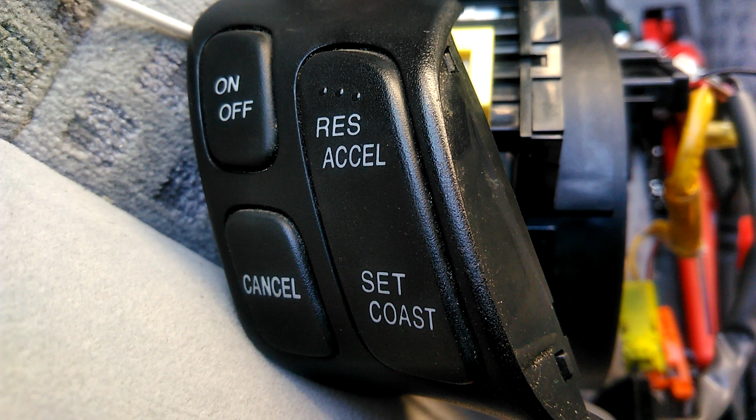Sorry for my voice, I had been to a concert.

So this is the cruise control from Mazda 6. I have already checked that it's working in a 6. It does work, so shouldn't have problems here. First, why do I think it should work, and what do I gain with it working?

This is the training manual for the Mazda 6, and it says that the construction and operation of the cruise control system is essentially carried over from that of the 626 GF model, except for the following. Now, these are all the differences.

Things are not similar. The cruise actuator with built-in control module has been adopted. So instead of having here a module electronics and under the hood an actuator, you have one thing only. This is the thing, and it is motor type.

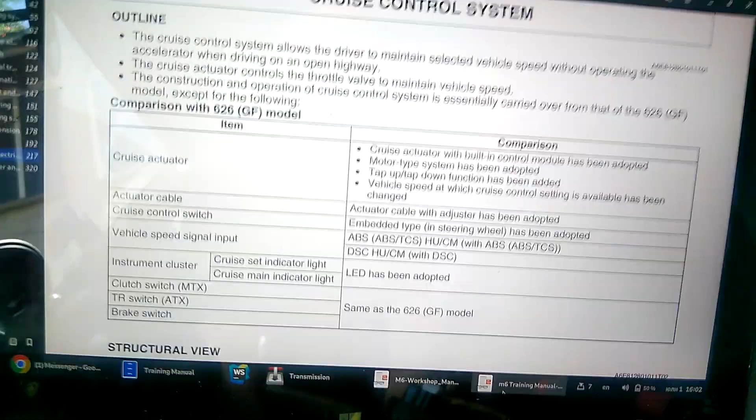The thing we have under the hood currently is vacuum type. This is a motor type, which is supposed to be more economic and more precise.

The tap up and down function has been added. That's why I actually want to do it, because I want to install a Mazda 6 steering wheel and I want this up and down thingy to actually work when I press it.

There are methods to actually make this work with the current cruise control, but I do not want to do that. I want an up and down function.

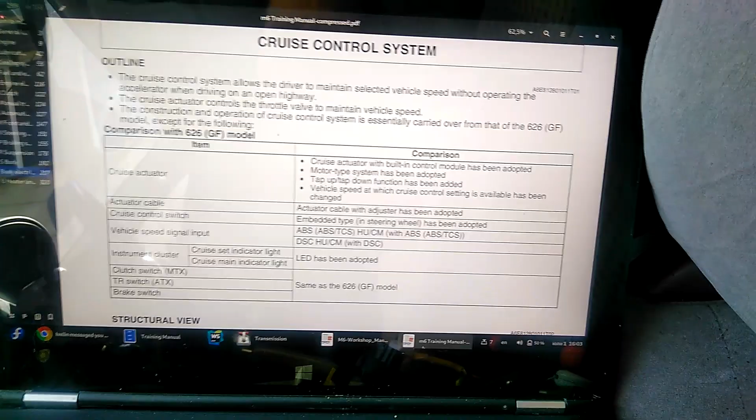And the vehicle speed at which the cruise control setting is available has been changed. It's changed to 30 kilometers, so it's lowered. Essentially we can turn it on earlier.

What's interesting is that we have the same clutch switch and brake switch, so nothing has to be changed for these. Nonetheless, I've done here a setup, a pretty simple setup.

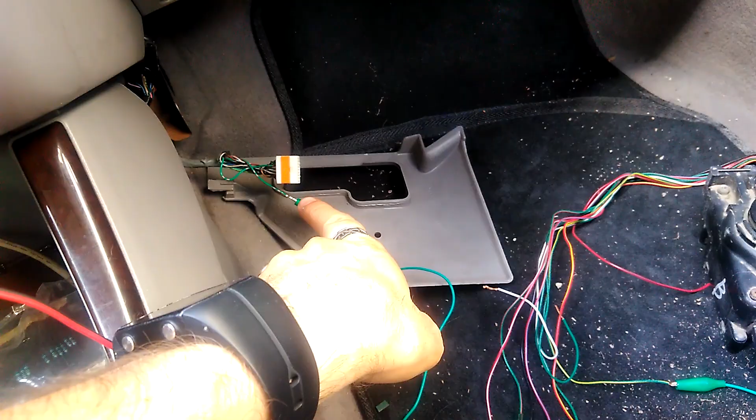The only signal I get from the car is the vehicle speed sensor. That's the only thing I actually care about. This is because I am a bit concerned, is the speed sensor the same?

Although I have switched this lever here with one from the 6, which can read the vehicle speed. You can actually check, I have a video on it, controlling the wipers based on vehicle speed, and it works. So still I want to check if this is gonna be happy with my vehicle speed sensor.

All the other wires I actually grabbed from here. I have here both battery plus and ground, and I have connected them as following here on this table. VSS, I told you I get it off.

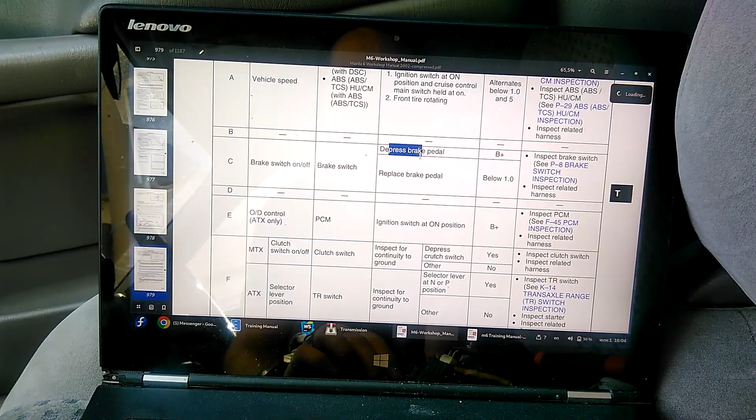This one, the brake on-off switch, goes to ground, because when the pedal is released, so when it's not depressed, it should be below 1.0 volts, goes to ground. And the clutch switch says when it's not pressed it should not have connectivity to ground. So this is the clutch switch wire, it just sits like that, nothing connects to it.

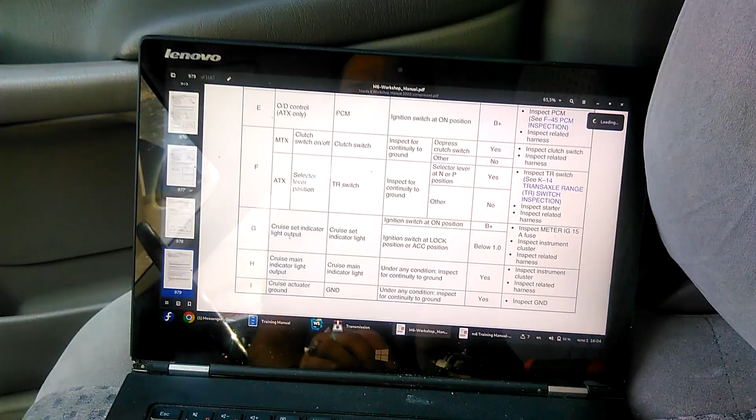Then the output, I've connected here the output. This one is supposed to show 12 volts when the set is on.

The main light I haven't connected, because I don't have it anyhow. The ground I have connected, of course, to ground.

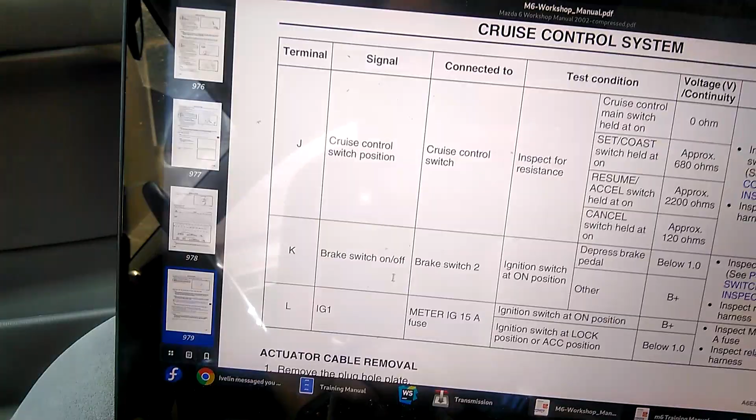Now the switch, I have here the whole assembly and switches, and I've connected it so I can easily turn it on. The brake switch goes to 12 volts, because this is the opposite brake switch 2, which is when you haven't pressed the pedal, you should pass battery plus.

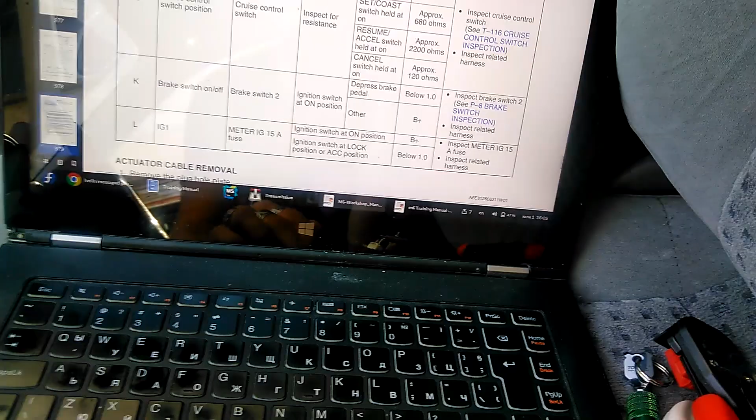And I have battery plus again here. Of course it's not when the ignition switch is on, because I get it from the accessories, which means I get it from when ACC is on, but that doesn't matter. So that's how I actually isolate all the switches that I have in the car, and I make sure that only the VSS is being read.

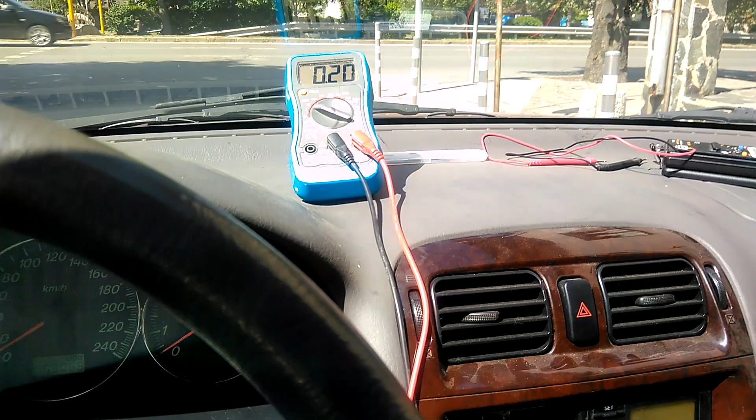So let's do a test. Okay, put my seatbelt on. Okay, seat belt is here. Supposedly, once I reach 30 I should be able to hit it, but I'll just to make sure, do it at 40 or 50 or something like that.

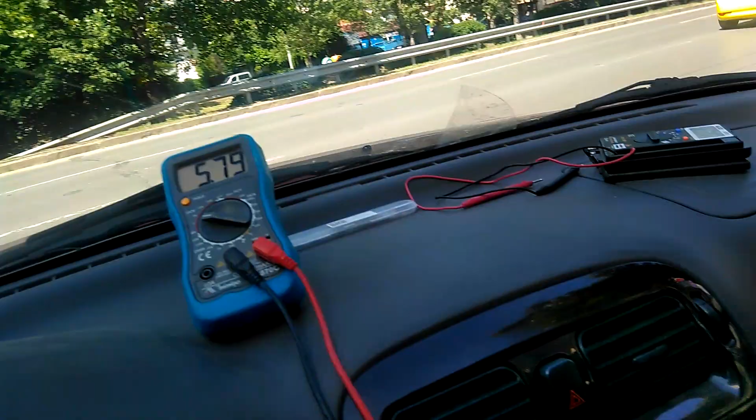Of course there's currently traffic. Okay, going. Okay, 40, I hit set. Yes. And you can see, and you can actually even hear it.

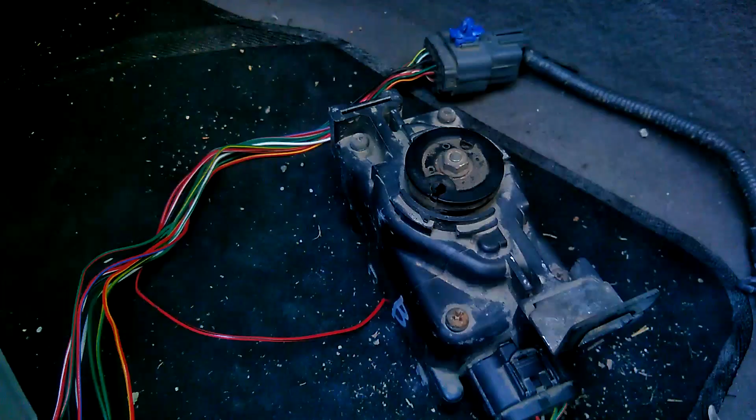Okay, it has reached the end because it figured out that it cannot accelerate the car even though it's trying, or maybe when I slowed down enough it actually cancelled. Anyhow, it seems to be working, so it's time to actually figure out how to mount it properly to the car and pull the actual wires, and then see what to do with the cable to the pedal.

Okay, so that's the temporary spot that I have found. I'll actually make it permanent, but I'll have to make more adjustments to the way I fixed it and the way that the cable works. But for a temporary solution, it should give enough idea if it's working or not. That's the original spot for the original cruise control. I'm using the same mounting here, and I also use the throttle body metal plank that holds the cable. I've also used it because of the way that it actually connects.

So just for the test, this is the original cable. I'm using this as an anchor point, so when this starts pulling, it actually pulls the metal part, not the rubber. Same goes here, that's why I use the throttle body. When it pulls, it's gonna pull the metal part. It goes like that, and goes in here.

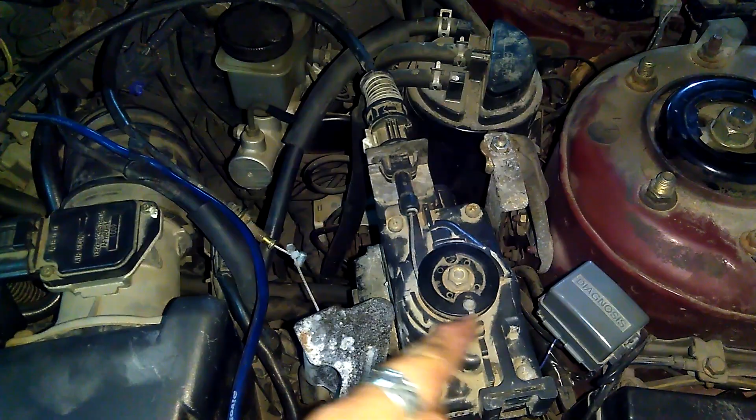Now that's temporary. The best thing would be to make this actually fit here. As you can see, the end is the same, but the length that I need here is way different than this one. This is way shorter. I'll see what I can do about that. As for the electrical part, that's the connector. Goes like that

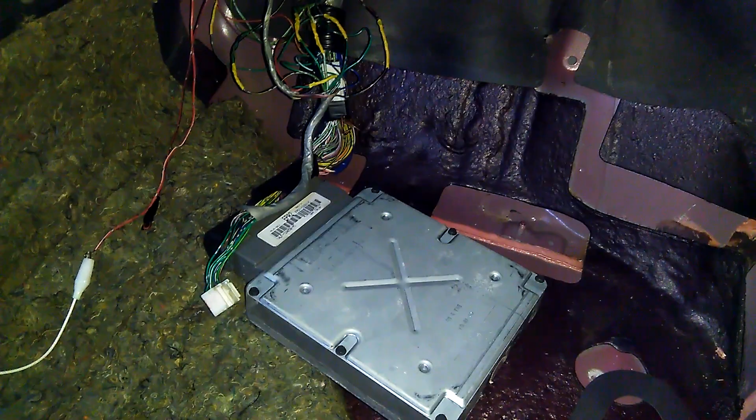and goes in here. Now if you do not know how to actually pull the cables through, or how to remove everything here, I've explained that in my other video where I actually install 626 cruise control to this car. Check it out, it's explained there how I pull cables through and how to disassemble everything here. So cables are here, all these yellow things are soldering points, and now I have an issue.

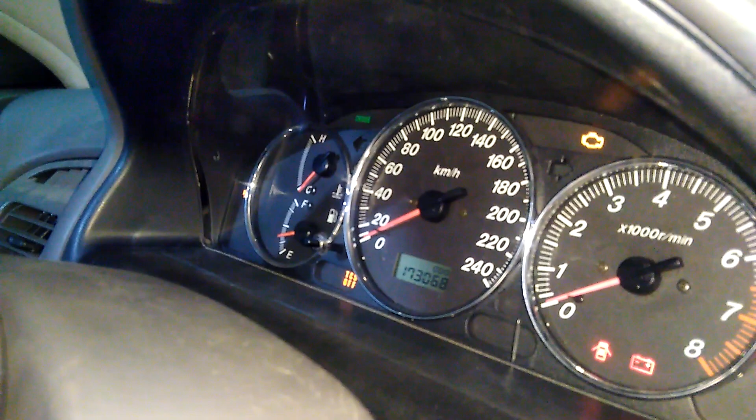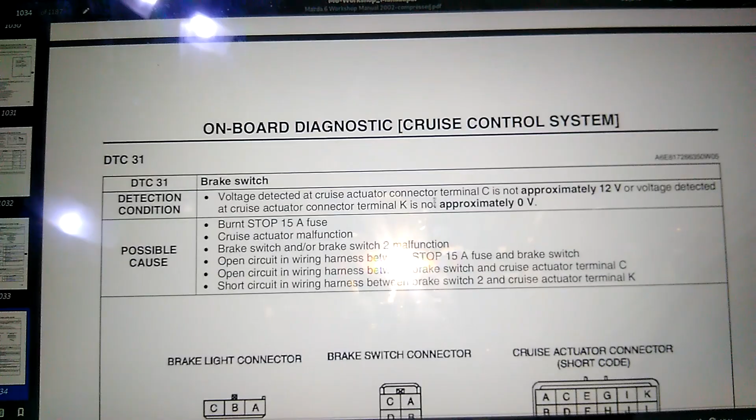I have started diagnostics mode: 1, 2, 3 long ones, one short one, and I've looked it up here. That's without me actually even starting the car. So I've checked the original one, doesn't have an error, and then I checked for DTC 31, it's the brake switch, and the problem is one of the two brake switches. So either the one that's supposed to have 12 volts when you do not touch the pedal, or the other one that has 0 volts when you do not touch the pedal, apparently doesn't work.

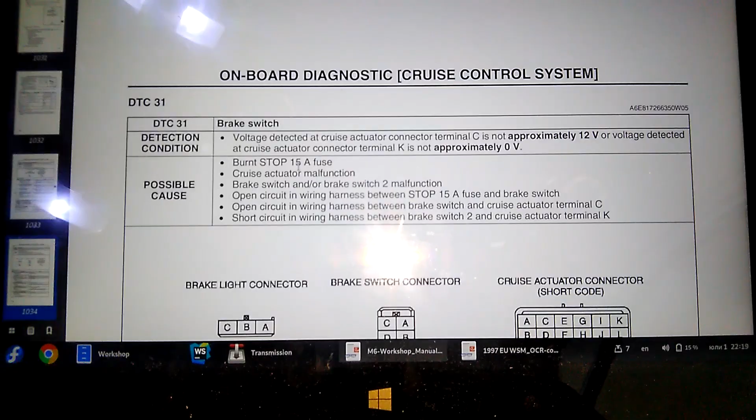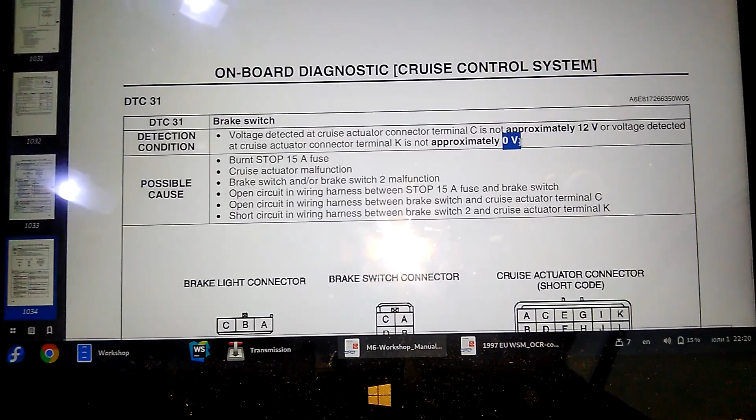So in the workshop manual it said it's the same switch, but apparently there are changes. My best guess is that for these 0 volts here, I was passing ground. I need to pass the ground here, and my best guess is the original installation of the car actually just has no connection, like it says here: open circuit in wiring harness between brake switch and cruise actuator terminal C. So that's my best guess, that I have an open circuit, so nothing is happening.

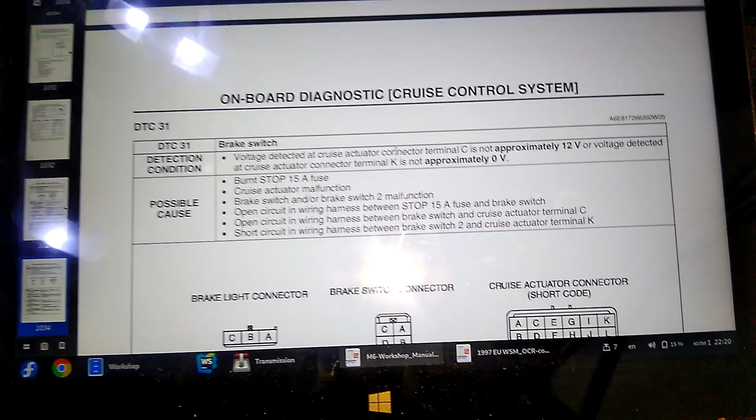I'm gonna do some tests now. I'm gonna measure what I get and see how I can modify things so I can get the proper thingy. Worst case scenario, if I get 12 volts here, I can use a relay, a double throw relay, and I can actually have a ground appear here, and that's actually better than having to change the whole brake switch,

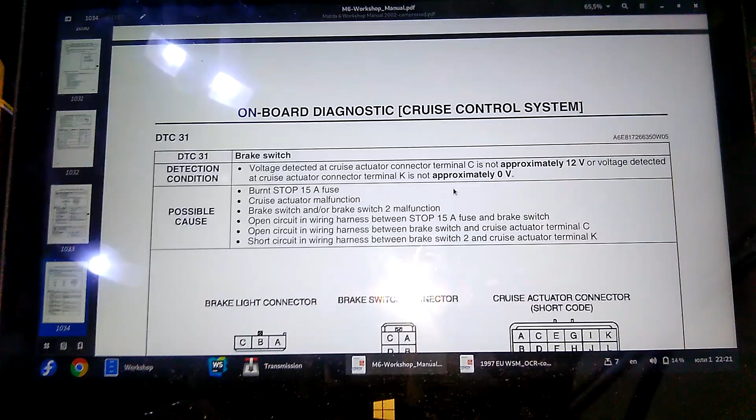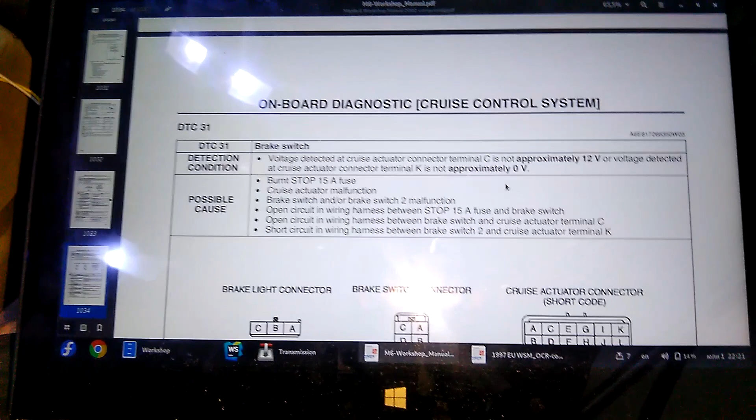because for the brake switch of the 626, if you watch again the other video of installation of the original 626, there are two types of brake switches. One is with cruise control and the other one is without cruise control, and I think you can use a simple relay to actually even use the original switch. Anyhow, I'll do some tests now, see why it is complaining about the brake switch.

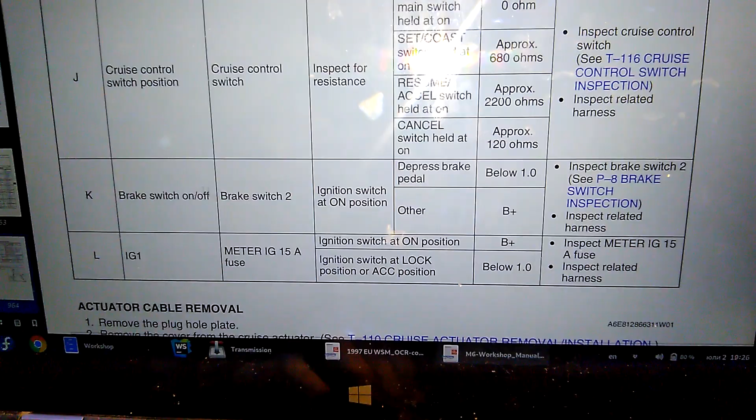Okay, I did figure out why the Mazda 6 cruise control is complaining about the brake switch. The problem was with brake switch 2, which is supposed to have battery plus if you haven't touched the pedal. So measure brake switch 2, and it's supposed to have battery plus. Now if you go here to the same switch on the 626, this one, with B plus, it seems exactly the same.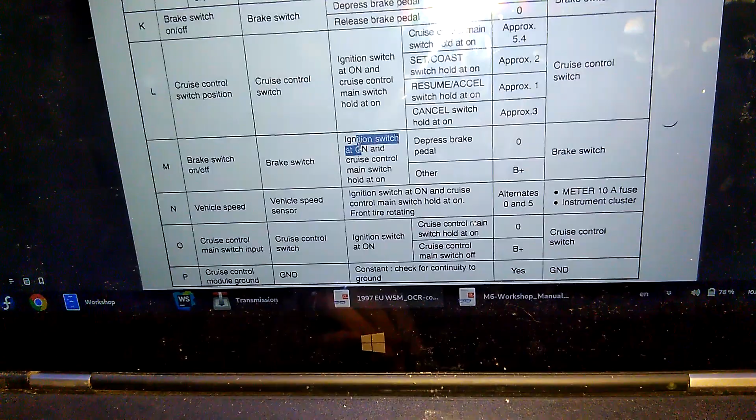Well, it seems. Now you have the test condition different here. You have to be on ignition on and cruise main switch held at on. Now that's the key: cruise main switch held at on. Here we have just ignition switch to on, and we have to get battery plus there. And here, if you just switch the ignition to on, you're not gonna get the battery plus. You have to also press the main switch. The reason for that is quite interesting.

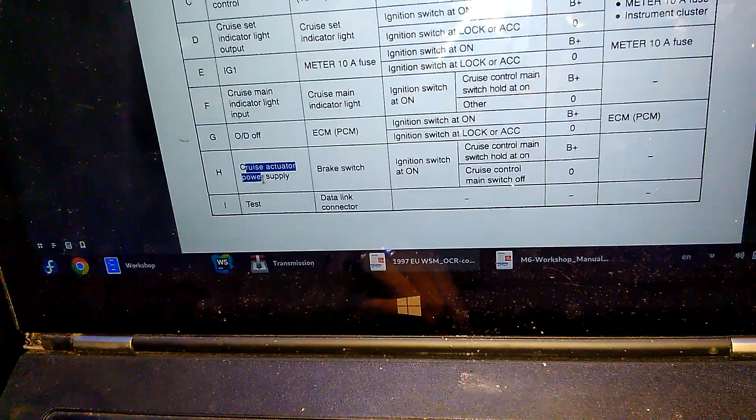If you take a look at this one here, cruise control actuator power supply, it actually connects to the brake switch, and also the test condition is from the ignition on, when it's at ignition on, and it helps to get battery plus.

So long story short, what I'm trying to say is the way that the Mazda 626 cruise control brake switch 2 works is by getting its battery level from the cruise control itself. So whenever you press this one here, you're actually powering on also the brake switch. So this cruise control actuator power supply goes both to the cruise actuator under the bonnet and to the brake switch at the same time. And then and only then you have battery plus at the brake switch.

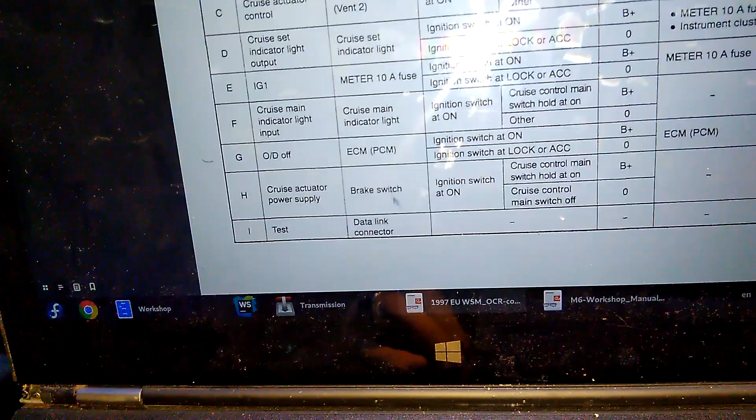While on Mazda 6, just by turning the ignition switch to on position, you already have it there. So when you press the brake pedal, you're already disconnecting, and without pressing it you already have battery plus there, while with the installation of the 626 you do not have.

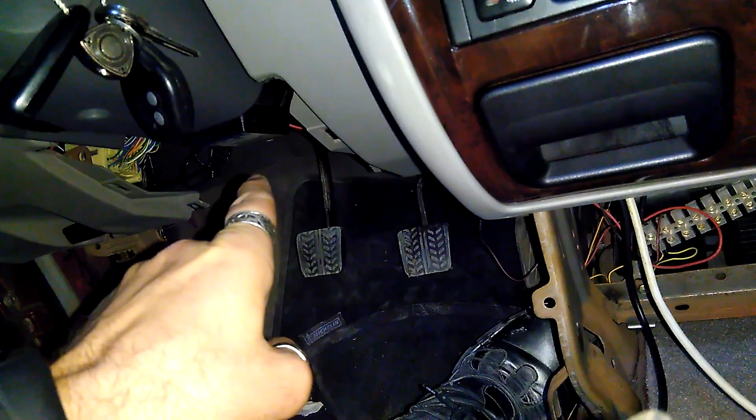So in order for me to solve this, I've just done this. There are two ways actually to do it. This is one way. It's dirty, and I'm gonna do it properly after I test everything works. I just connected the ignition wire with the one that's for powering the cruise control actuator. The other way is to actually fix it here with the brake pedal, with the brake switch. You just connect there the ignition to the other wire.

Now I prefer this way because it's backwards compatible. If you decide to go back with the 626 cruise control, you just unplug these and plug the cruise control. Nothing is going to change. And in the other way, if you do it on the brake switch, when you place here the cruise control module, you're gonna have extra 12 volts coming instead of going out, which probably shouldn't hurt anything, but I don't know what could be an issue there. So I prefer this way.

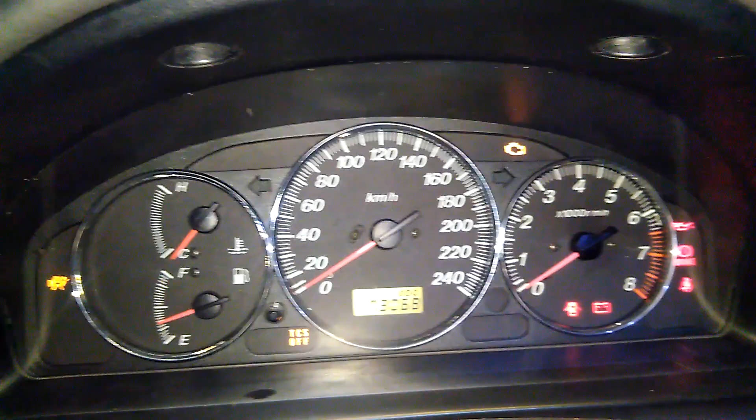And now I've entered the test mode. As you can see, nothing is lit here. If I press the brake pedal, then I get this code 31. That's what we want. So no errors, everything checks out. Let's go and test it on the road.

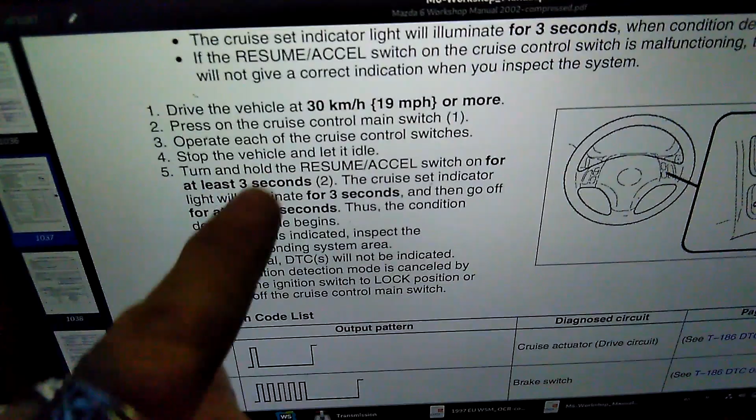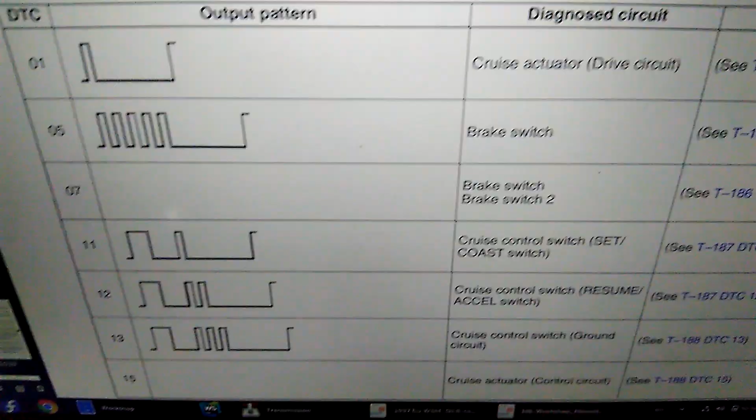So I did a test, it didn't go well. So I executed here the other detection mode, condition detection mode, which actually involves driving first, then doing some stuff, and then seeing what the error code is. In our case, this blinks 7 times. 1, 2, 3, 4, 5, 6, 7. 7 times, and 7 times is, guess what? Again, brake switch. So the previous didn't complain about the brake switch, but while driving apparently it doesn't like something with the brake switch. I'll have to figure out what it is.

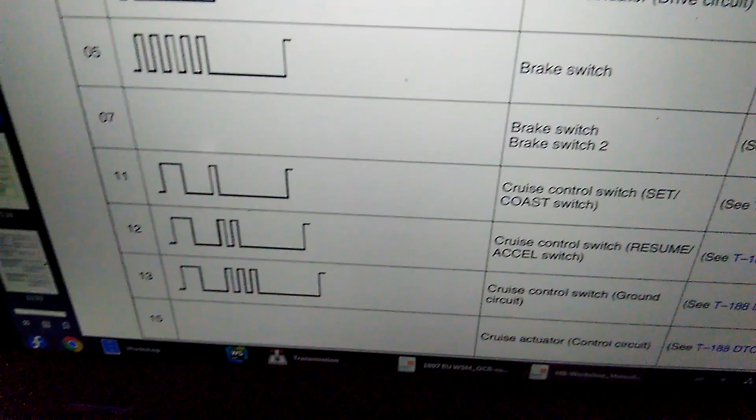My plan is to actually remove the 2 wires that go under the hood to the module, and actually apply to them the same voltage that I applied in the same way at the beginning when it was working. My best guess is it's complaining about the 0 volts, because it's not actually 0 volts, it's floating. It's not 0 volts, it's disconnected. My best guess is I need to have some 0, actually ground, to go there. We'll see when I connect stuff and isolate the brake switch. I'll make it like it's always not pressing the pedal. Then we'll see what happens.

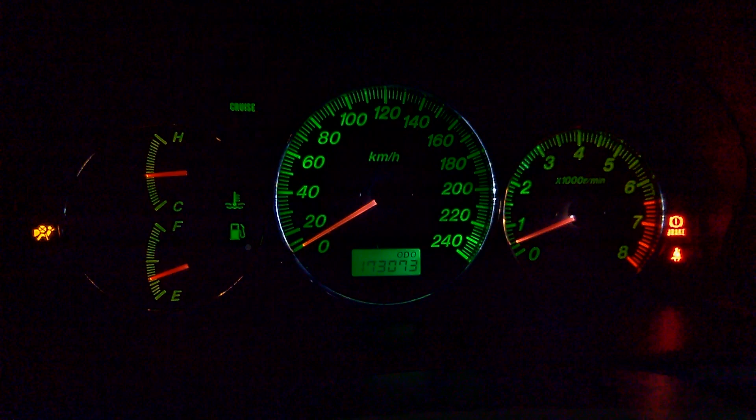Okay, so that is the difference between how the Mazda 6 and Mazda 626 installation systems work for the brake switch. I have installed here pull-down resistors. For those of you who do not know what a pull-down or pull-up resistor is, whenever you're dealing with switches like the brake switch here, it actually leaves your wire in a floating state, so it's neither connected to ground nor to battery plus. It's just floating, and when it's floating it picks up noises, lots of noises that are all around you. And these noises are actually voltages, so when reading voltages you can actually read quite high voltages, like 7, 8, 9 volts, which could be considered as high from the logic of the cruise control.

So it doesn't matter that it doesn't have any current to it that will power on anything, but it has the voltage, so it's fluctuating between high and low state. That is why you need those pull-down resistors, in this case down, because whenever there's 12 volts it's high, and we need, whenever there's no 12 volts, to be low. So it's a pull-down. You just connect the same wire to ground through this resistor.

Now, as for the value of the resistor, I've used 260 ohms, quarter watt, so they do seem fine. Everything seems to be working for now. We're gonna go and test outside in a bit, but I left it in the on position. When it's in the on position, there is current flowing through here, and one of them gets hot, but it's fine, it's not that hot. I believe 260 should be fine. It's ohms, so it's low enough.

And now let's test if the cruise control is happy with the procedure. Let me just turn it on. Okay, cruise, and no fault codes. That's good. That's very good. Now we press the pedal. Here we go. 1, 2, 3. 1. Okay, that's beautiful. That's very good.

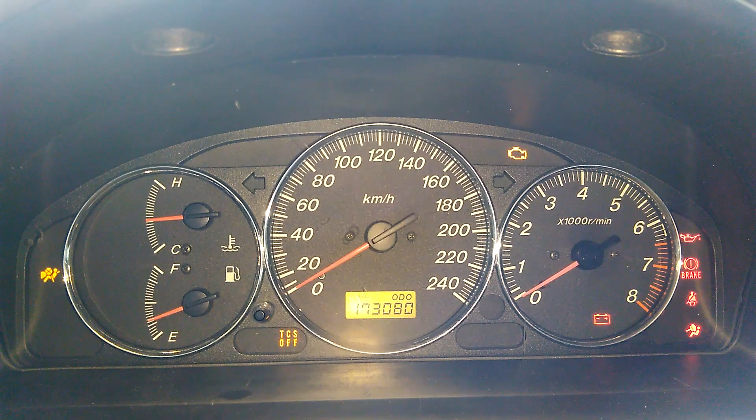This means that we actually, and that's the clutch. 1, 2, 3. 1, 2, 3, 4, 5. Yes, clutch is working. The other ones should also be working. This is the reset. 1, 2. 1, 2. Okay, 22. That's apparently the reset. And now when I press the set, 1, 2, 1, 21. Okay, this is everything you can test, and the other one is driving.

It seems to be working. It seems to be happy with the pull down resistors. No issues. Let's go on the road and see if we finally can get this to actually start cruising the car. Okay, let's go.

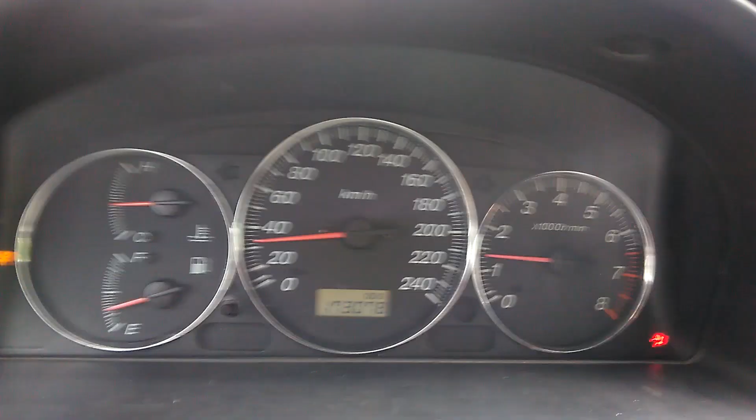We are at 40. Let's give it a bit more. Hit set, and it's actually set. It stays, but the car is slowing down. Yep, we are slowing down. Probably we're gonna have to stop. Doesn't want to pull the wire up, and it has actually automatically stopped because I reached 30 kilometers per hour. So it's a mechanical issue. We're gonna see in a bit what happened with the cables.

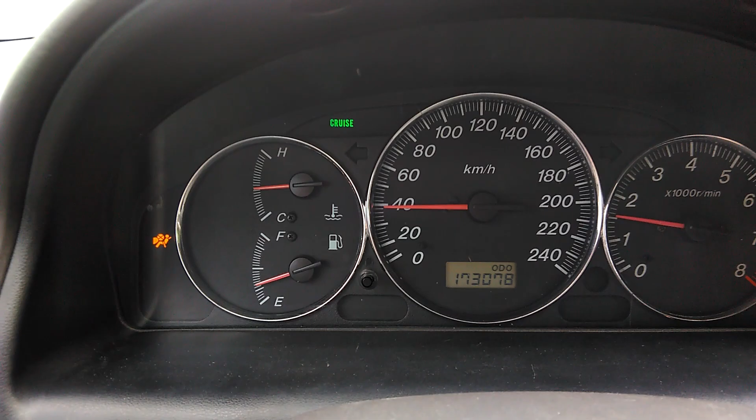Let's give it another shot, so we know that it's actually not random. Okay, 30, 50, set. Here we go. It is actually set, but again we are slowing down. It doesn't want to pull up. Let me try to press accelerate multiple times. Trying, pressing, no, doesn't happen. So something went wrong. I believe it's still pulling it a bit because I'm not slowing down enormously, which should happen when I'm driving in gear.

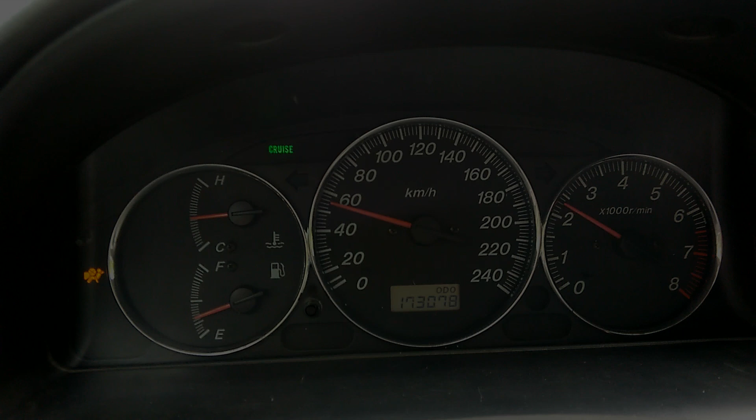Okay, let's see what happened with the cables. It seems like the anchor point that I was using here is too weak, and this actually pulls the cable. I need to make this cable strongly fit so I can do the mechanical test. But I can see it's actually working. It was moved like that, and I actually left it like that. So it did move it, and this is why it's actually not working. I need to make it stable.

So I came to the cutting part of the cable. I did try fixing this better. It did work. The car was actually able to accelerate. It took it some time until it reached there because there was still a wobbling part. I also noticed this pulsing movement that I noticed when I was using the cruise control logic from the MPV, which you can see in the other video for installing MPV logic to the 626.

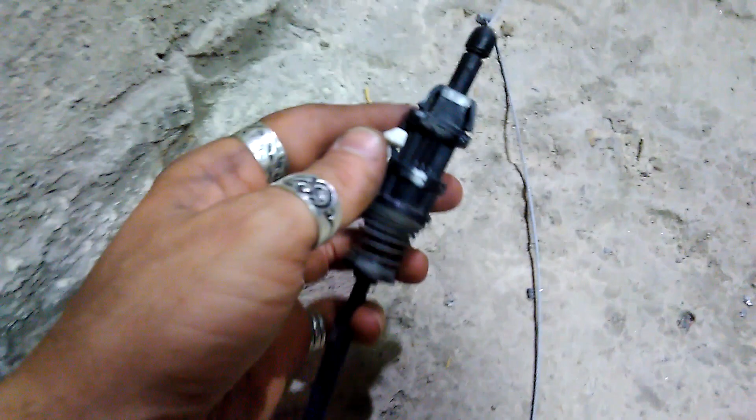Anyhow, I decided that it's time to fix the cable. So I tried to remove the whole cable with the shield. Unfortunately, we have these kinds of clips from the inner part here inside. I lost 1 hour. I even removed the gas pedal just so I have more room. I'm unable to do it. You need special tools to actually squeeze those. So I directly cut it. As you can see, that was the end, like that. So I've just cut it.

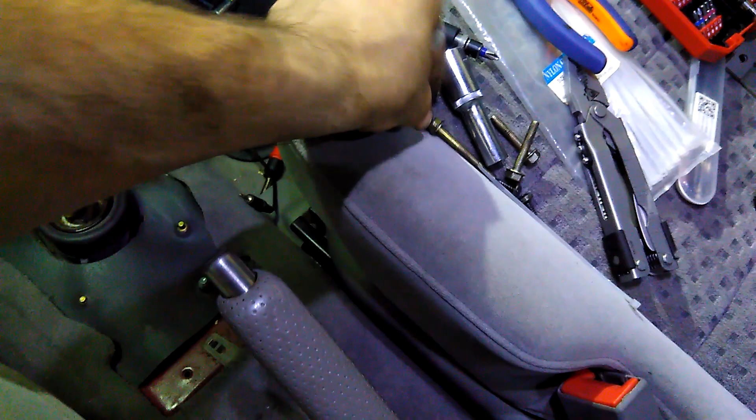Anyhow, that is the length of the cable. We are going to use the same shield, but we need to increase cable length. And as you can see, we have plenty. It ends here, and we have all the way up to here. We have like triple the distance. So my plan, how to fix it afterwards, it's quite simple. I'll show you now.

This is one of those electrical connectors that you plug wires into from both sides and then use those screws to screw them in. I'm just planning to do exactly the same here. Place the cable and screw with the 2 screws. Now we're gonna see if it's 2. It's supposed to be better with 2, but as you can see, there might not be space for the second one.

Anyhow, it fits perfectly. That's actually where the ball is on your gas pedal, and these ends are the same. So what I'm gonna do now: cut that part there, get the whole cable out, stick the whole cable in the 626 and start adjusting with this until I find the right length at which this should be, and then I can cut it. Simple cutters, actually cheap ones, were able to cut this, so it's not that strong.

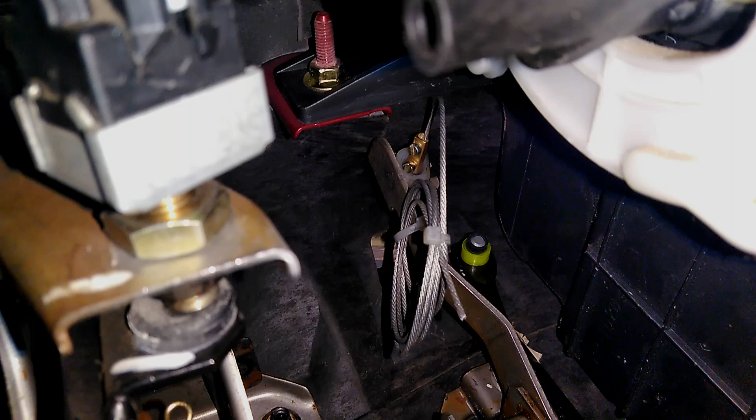Okay, let's do it. Okay, that is the result. There's lots of excess cable. I've actually zip tied it to the cruise control part. Moving it like that is fine. Moving it like that is also fine. It's not in the way anywhere. Okay. Now, let's go.

Here, the prototype is getting closer. I have different mounting. I'm out of nuts, I have to go grab some. So this is the original shield. Comes to here. From here you can adjust it if you have a little bit of slack. You should have just a little bit like that, but if it's more, you can adjust it from here.

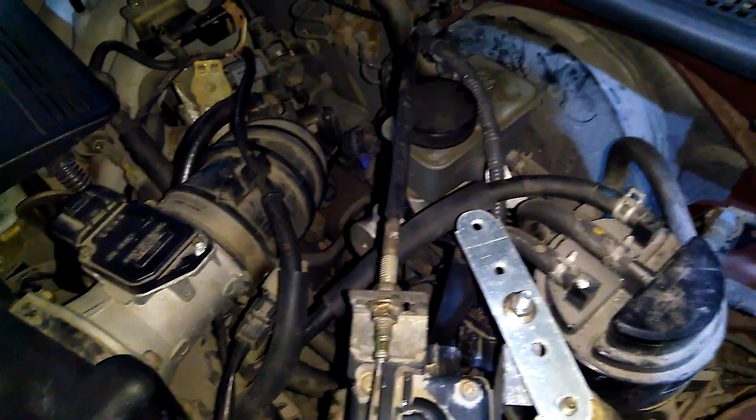And right now, let me try to grab it. There is the throttle there. If I start turning here, it's hard. Let me try. You can see it actually turns there. That's exactly what the cruise control does. Okay, let's set some nuts and go test it. Okay, time to go. Nuts are placed.

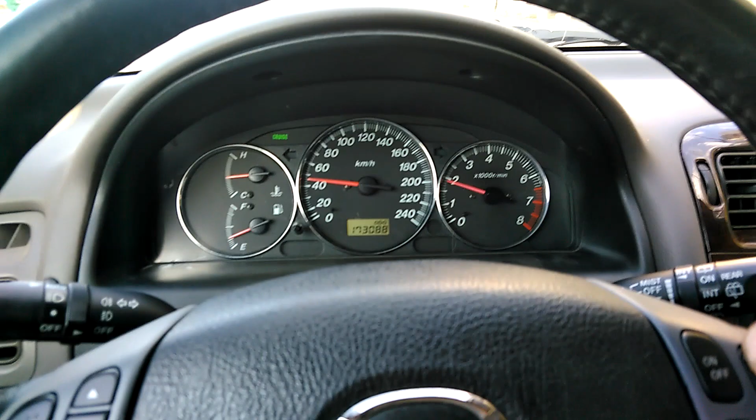40. I hit set. It picked up. Holds the speed. Now I'll hit increase the speed, and it does increase. Seems a bit more than a kilometer, 1.6 kilometers per hour. There's this pulsing again. It's actually holding it.

So I'll increase again. It actually does increase it with about that much, yes. Increase again. Yeah, exactly that much. Increase again. Yes, pretty much. Let's try decreasing. I'll press multiple times. Yes. Very good, I'm happy. Okay.

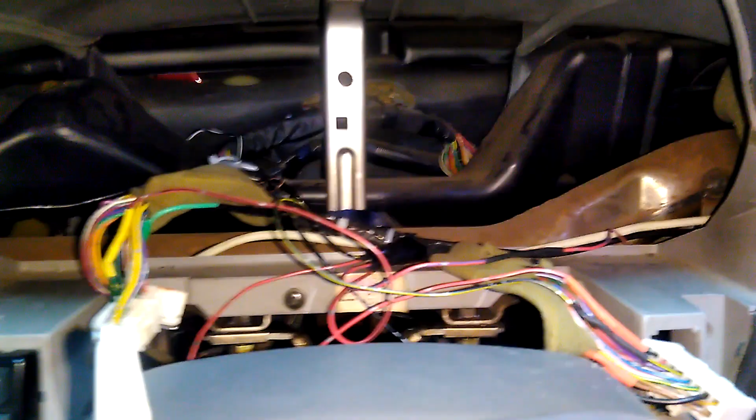I'm currently installing the indicator for the cruise main because when I press, I don't know if it's on or not on, and I do not want to leave it on constantly. So this is the wire from the cruise control. It comes to here, and I have a relay here. The point of that relay is to turn off the main while the set is on, because I want to use the same indicator. Let me grab the instrument cluster.

We'll be able to see cruise. It's barely visible. Maybe on this one here. Yes, this one. You see it's green, but even though it's green, if you shine through it another color, it's actually gonna come white. Not white, but the color you shine through. So I'm gonna shine yellow/orange, and I want the yellow/orange to turn off once the green one is on. That's what this relay does.

So this is a single pole double throw relay. The signal comes here, and it's on the normally closed position, continues down to here. I'm gonna speak about the bulb in a bit. So normally closed. The set is actually controlled by ground. This is the set pin. You can see there are 3 wires here, then a hole, then the set pin. It's a pure green wire. Carries ground with it.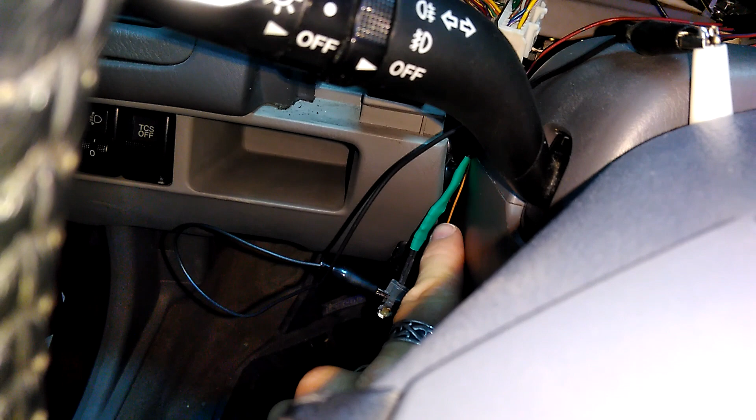Another thing here: this is the yellow bulb. As you can see, the wires are sticking out. That's controlled by 12 volts. So I have constant ground here. I get it from, well, ground. That's the ground. So the constant ground is from ground. And I have a pull down resistor here inside of this.

Anything below 1 kilo ohm should do, I guess, because for some odd reason I found that the module actually gives me some voltage on both the set and the main, so both of them have pull down and pull up resistor, because one is controlled by 12 volts, the other one by ground. So here I have pull down.

The pull up resistor for the ground is actually mounted here, right here, between the ignition and again the pure green one. You have a resistor below 1 kilo, and actually from here I get my current setup. This is only to show the demonstration. Goes like that and goes to the plus side of the light bulb, and then the minus side goes with this extractor into the actual minus. That's so I can actually make the light bulb lit as if the instrument cluster is here. I do not want to twist much of the bulbs, so I'm gonna demonstrate like that.

So I turn on the ignition. Now on. This is the on. Now I'm gonna go into the diagnostics mode. And now you can see only green, and then go back to yellow, green, yellow, green, yellow. So it's working. It doesn't want to focus the camera, but the other one is actually disengaging. Okay, let's assemble everything and see the final result.

By the way, my first try was with regular LEDs, not SMDs. These are not powerful enough, and also they are more focused, so only 50 to 60 degrees viewing angle, and when you shine through here you can actually figure out where the LED is, which I do not like. I want even lighting. I'm hoping with this I'm gonna get it, so let's assemble and see.

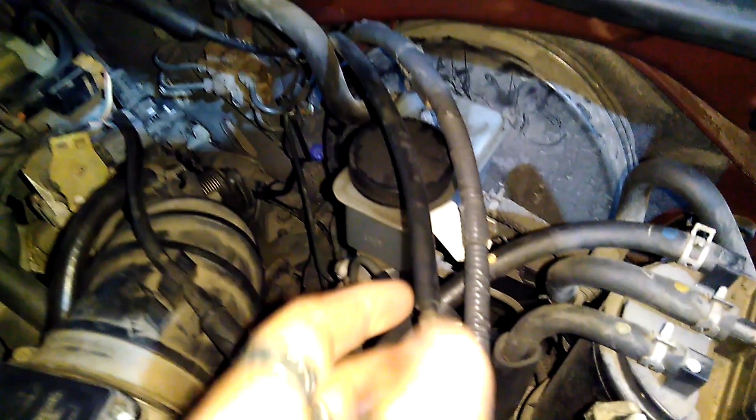Okay, before we go do our final drive, let me show you how I fixed everything. This is original mounting brace from the cruise control, same goes here, those two. The original one was holding on 2 points only, while the MPV one holds on 3. I used only 2, seems stable enough. I had to do these black ones or additional ones, so I fit it properly. Then the cable loom goes through here. I have used a few zip ties here and there. Not that it's hot there, that's the intake, so it shouldn't be hot as the exhaust here.

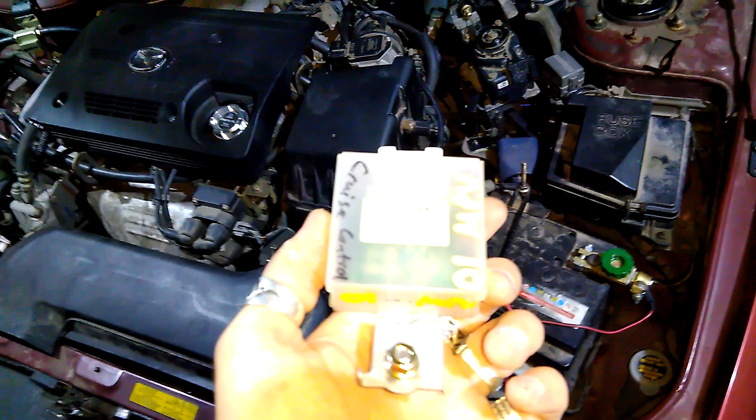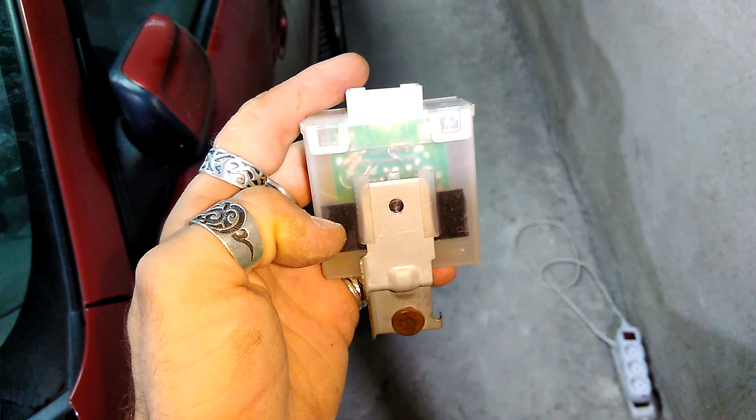And as for the electrical part, I'm using the box from MPV. I didn't want to do a bad job and remove all the circuit board for the cruise control from MPV, so, okay, let's try better lighting. This plug right here, this is actually from the clock. The plug for the clock and the cruise control module are exactly the same. So since I've swapped my clock with an actual board computer, which uses the same plug, I was left with one useless clock. So what I did is I got the PCB, removed all the components, and installed the pull up and pull down resistors and the bridge that you can see.

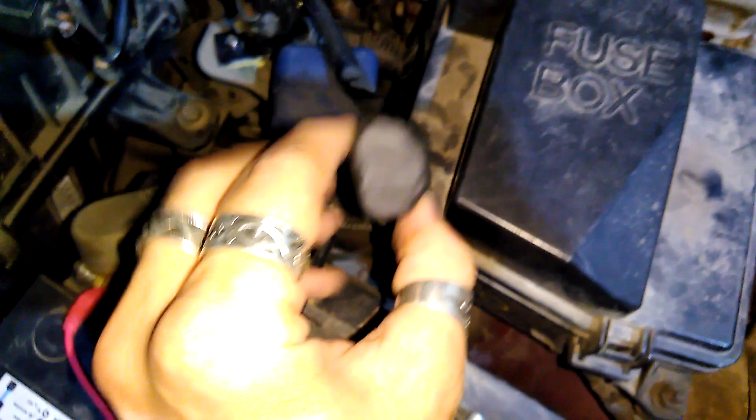And because it's a little bit smaller, I had to actually glue it. And this actually will do original fitting. Now I just fit it to the car, plug in here the wire, and done. No vibrations are gonna break this one. For the cable of the cruise control actuator, old one, I actually used one of those self-vulcanizing tapes, and I just wrapped it. Now it holds everything, it's not gonna get dirty over time.

So to make things clear, what you need if you want to install a 6 cruise control to a 626, if you do not have a 626 cruise control, you will need some mounting braces. You will need the cable from the 626 and the cable from 6, of course, the cruise control from 6, the gas pedal from 626 you also need, and I believe that's it. You do not need original existing wiring and stuff like that if you're gonna simply do directly 6. Just the 6 controller, some mountings, and the gas pedal, because this pulls the gas pedal. You need the shielding here. That's it, let's go test.

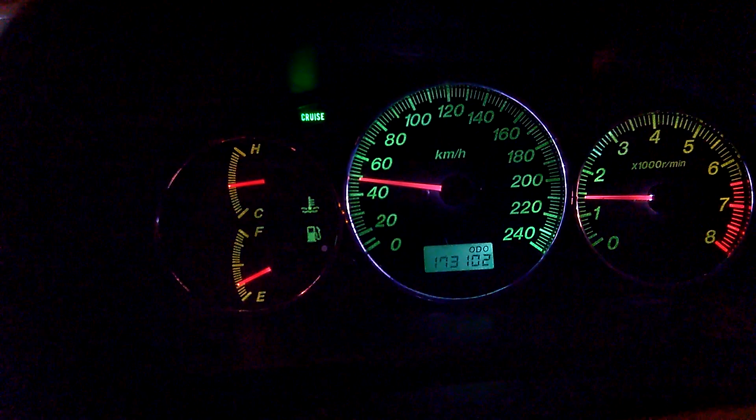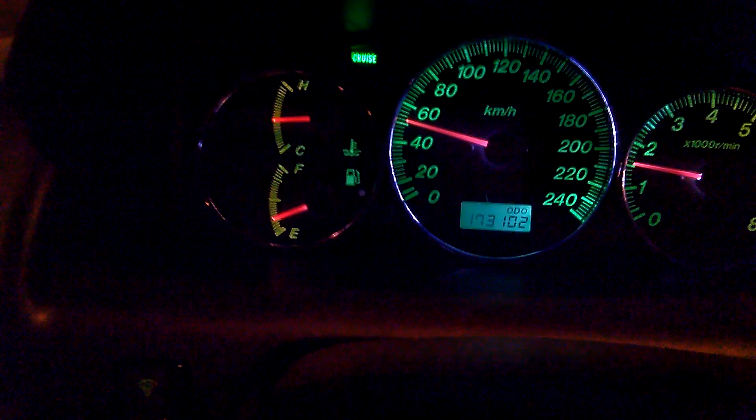Okay, on, yellow light, beautiful. Let's hit set, green light, beautiful, and the car just picked up. I'm happy with the result. The only thing that I find as a downside is that it seems to be a little bit slower at picking up the speed of the car. So I guess the motor actually spins slower than the vacuum did. But once it picks up, everything is perfect. No pulsing, keeps the speed proper. I'm happy.